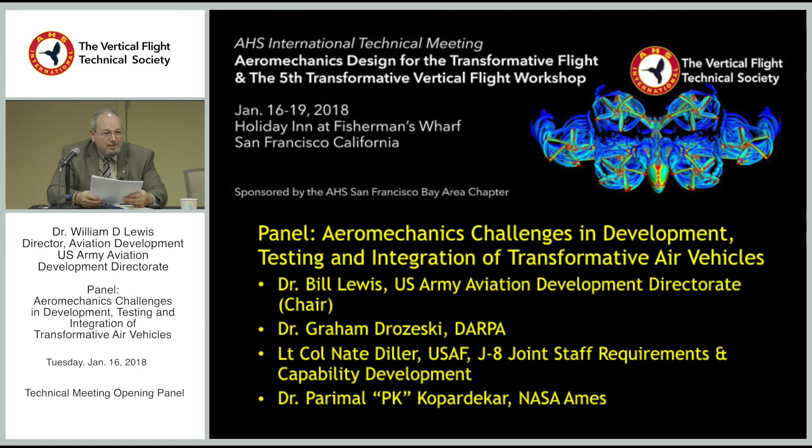But prior to getting to DARPA, Graham also served as a chief engineer down at Aurora, where he developed advanced VTOL rotorcraft and VTOL and fixed wing autonomy systems, transformational technologies, and operations for ship-based unmanned systems. He also spent some time as the flight technologies point of contact for Karem Aircraft, where he served as the lead for military rotorcraft developments. But the most important thing, he was a U.S. Army aviator. He got a PhD and a master's degree from Georgia Tech and a bachelor's from Notre Dame. Graham.

Thanks, Bill. Sounds like it's working. Bill introduced me at a specialist meeting something like 15 years ago. Army aviation, the VTOL community as a whole was in a very different place then. Comanche had just been canceled, DARPA followed by canceling UCAR. The V-22 was getting over the Marana incident, but it was still a very different time. The Army was backing away and saying, we want to go back and double down on our old platforms from the 50s, 60s, 70s.

Now, today, where we are, it's a completely different field. Where we've come in the 10, 15 years since then, from starting all these platforms, whether it's V-280, S-97, all the new things that are coming up in the commercial industry. That's what I want to talk about today. And I want to talk about synergies between those two spheres of development and how we can push forward as we move ahead.

Okay, so that's where I went through this slide, and here's sort of a quick look at two different but similar mission sets. And here we are, right here in San Francisco, and later this week I have to have a meeting down in San Jose, and I wish I had one of these things that got me there in 15 minutes. But I'm going to make that drive.

I'm going to talk a lot about both industries, and unfortunately most of the stuff that I talk about on this use case on the right is rooted in the Uber Elevate report. That's only because the Uber Elevate report's in the public domain and provides lots of good data. So please don't say that I'm advocating Uber above any other implementations in this realm, but certainly amazing things are being accomplished here. I'd also say amazing things are being accomplished here.

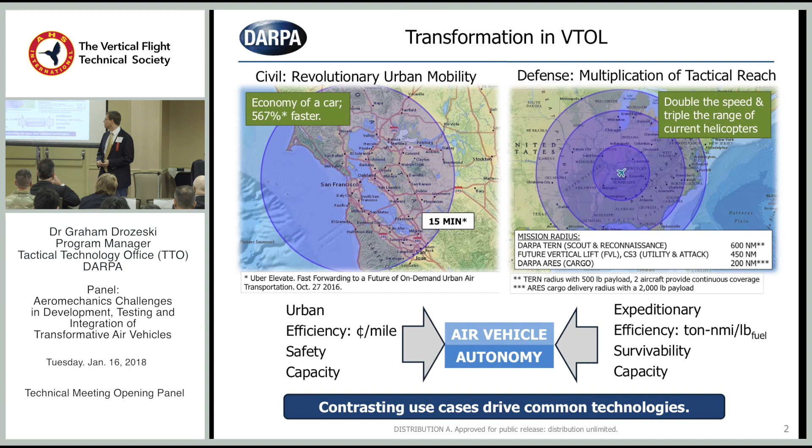If you look from the Black Hawk to the Future Vertical Lift, there's a 4 times increase in payload range. Now, Future Vertical Lift aircraft are going to be probably bigger than the Black Hawk. They're also going to be faster and have all sorts of other features we don't have, in terms of survivability and other capabilities built in from doing an aircraft so many years later. But there is a big leap there—a big leap in efficiency as well as a big leap in capability in terms of payload range.

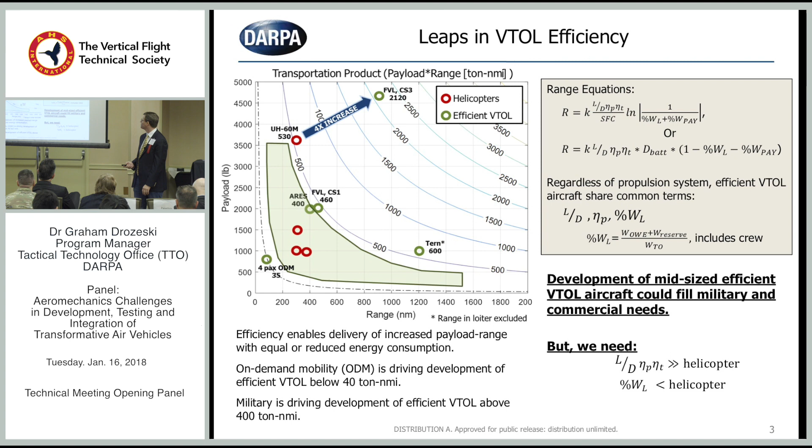And controlled flight into terrain is something I always bang the drum on. That is a large contributor. When you're at speed and you hit the terrain, the number of casualties on board is catastrophic.

That being said, as we start and look at use of these aircraft in routine usage in CONUS, in the national airspace, these sorts of fractions of non-human to human are also not acceptable. Not acceptable, maybe the percentages is acceptable, but we have got to dramatically reduce mishaps and fatalities to get wider acceptance of VTOL. And so either way you're going, I'd say all the civil stuff goes through this problem. It's a little different problem when you're not getting shot at, but it's still a problem.

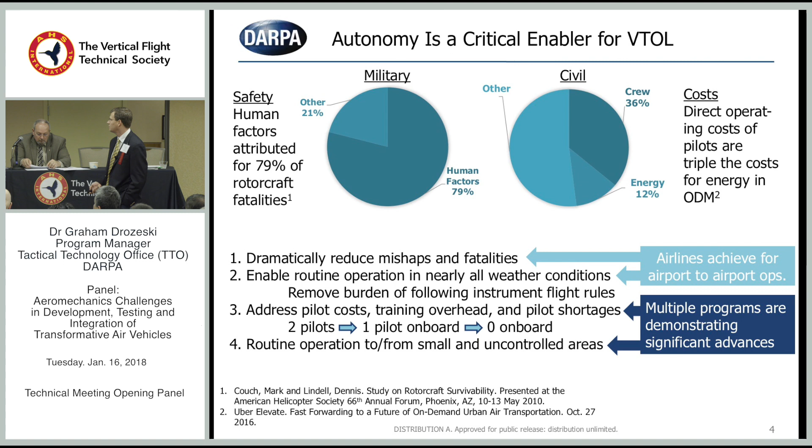I'm working on this, and I think I have a vision for the throughput we'd like to have, but all the ideas you have in terms of ways to get certificated autonomy in the field, I'm eager to hear. I think we want to be able to leverage all the great things people are doing in computing, non-deterministic algorithms, and emerging AI. We don't want to cut that off the table because of certification implications.

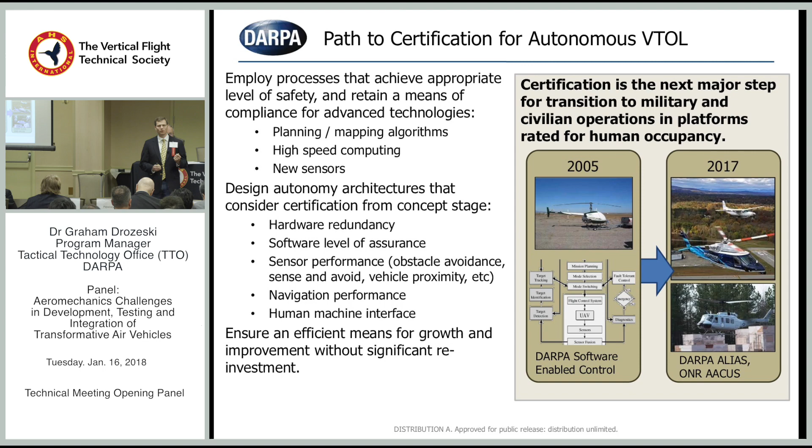The second thing I'd say is don't do it in a stovepipe, one-off method where I can't come back later and add a new sensor, a new algorithm, or a new sensor or algorithm from another vendor. I want this open so I can pull all this in without having to redesign and recertify all my flight code. There's a Tesla story - the Tesla saw a kangaroo and didn't know what to do with it in Australia because that wasn't in the database. How do we bring that in without rewriting our flight control laws? We need a way to do that. That's the second slippery slope.

Okay, this is a VTOL platform discussion, and I've been involved with a few of these developments, so I decided to talk a little about some heartburn, some scar tissue I have from those development programs. The sooner you can model the interior of the conversion corridor - not just at hover and at fixed wing, but in the middle - the better off you are. It's very easy to approach a program like this and say it's going to be somewhere in there, but the devil's in the details.

And I think there's been program after program that have come to the realization that I wish I had a better model sooner in the development. And so I'd say think about that.

I'd say all aircraft, even the coaxes that Sikorsky is pursuing, they have some sort of transition from a helicopter type regime to a highly efficient greater than L over D of 4 type regime. I'd say that when you write the requirements for your conversion corridor, think about everything you need out of it. There was Ashish, under his X-plane program, who said you need to have trim at all airspeeds, and that is a good way to define it.

But some aircraft need more than trim at all airspeeds. The tilt rotors need to fly descending approaches, which means you need to be able to trim with a negative gamma. We had on the Joint Heavy Lift program a CT on sigma requirement at 80 knots. So there's requirements like this that come in, but you need to understand them so you know what you need. And oh, by the way, there's failures that can occur at any point. I can fail a tilt actuator, I can fail any of these things, and you need to think about how you're coming back from that.

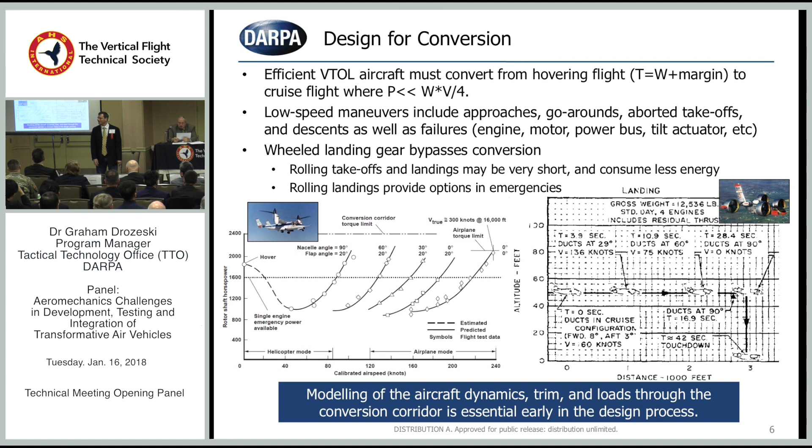This is my closing slide, and I'd like to look again at the pictures on the right. These are all military programs that either recently flew or are soon to fly. If you look at where we were in 2004 when Comanche was canceled, we're in an incredible place. We're going to revolutionize what the military can do in terms of vertical takeoff and landing in the near term, and all these things are happening even faster. It's an incredible time, an incredible opportunity to revitalize the military community that's driven VTOL.

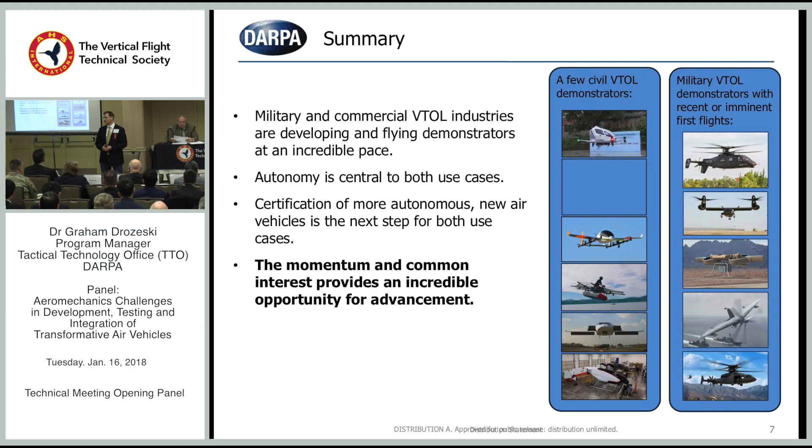The revitalization we can get from the community that's really home here in San Francisco is a huge opportunity, to drive new paradigms in certification, new ways of thinking about the aircraft, faster development cycles, and new ways of thinking about pulling software into the platforms. All those things are opportunities for us, as well as for the people, because this industry comes back to people, getting the young software engineer, the young aerospace engineer jazzed up to want to work in this field. It's great. So I'm excited, and with that, I'll turn it over to questions.

So with that introduction, I probably need to start by making sure you're not losing faith in Barry, who invited the fighter pilot to come talk to a bunch of professionals in the rotary wing business. Thanks for the opportunity to do that. Between Barry and Mike, they wanted me to talk a little about requirements, being in my current job on the joint staff, and also test, because clearly with my one flight in the Dolphin, I am the world's renowned expert on rotary wing flight test. So sit back, and I'm sure you're going to learn some things.

Thinking about some of the existential threats like Barry has with his job right now, maybe step back and look at what are some of the key questions of really why are we here today. And in doing that...

Looking around at a lot of the literature, we talk about the hype curves on certain things, and certainly eVTOL is quickly going up the hype curve. And so in doing that, with the humility of a fighter pilot, as everyone knows, looking at what are we really trying to accomplish here.

And it seems like a pretty humble pursuit, trying to revolutionize transportation for the world. So why not? It seems like a phenomenal effort.

Before we really start looking at that, I thought it'd be good to look back just a little bit at some of the other revolutions in transportation.

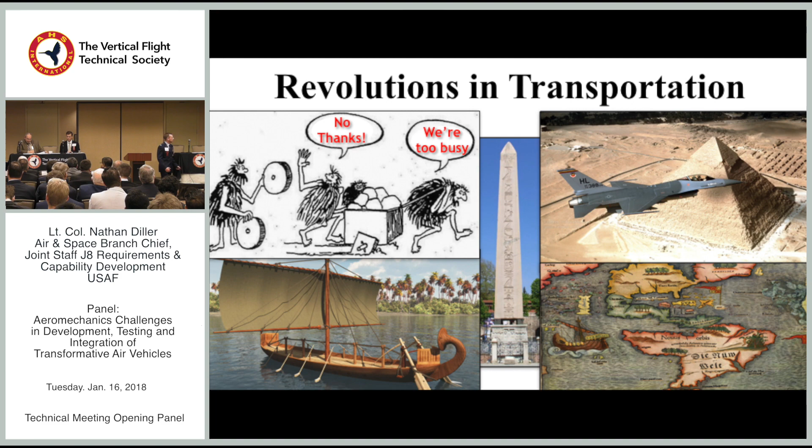Eventually, further revolutions in transportation started to go green and take wind energy and use that to start moving us across continents, revolutionizing transportation, again resulting in the amazing discovery of new worlds.

This revolution eventually started to heat up a bit. If we start at the bottom, with the steam engine helping push along the Industrial Revolution, the vehicles coupled with the Eisenhower interstate system allowed us to have a social revolution in the United States, and then eventually aviation.

And certainly, while the interstate and the ability to travel and ship a lot of things across sea were important, few could overstate the value of being able to connect people around the world and the globalization that resulted from revolutions in aviation.

And so there's been discussion that we're in this third revolution of aviation. Interestingly, one of the individuals that suggested that was currently working at a company in Toulouse, France.

I'm not sure how he didn't recognize the first one, given the French can't let you say the word Wright brother without talking about les frères Montgolfier. So starting with hot air balloons, eventually going into reciprocating engines, and then to jet engines, we see this transformation of revolutions in transportation.

Interesting, as you look across these different revolutions, there's some things in common, that there's also been an important requirement to invest in infrastructure: the railways, the roadways, and eventually the runways.

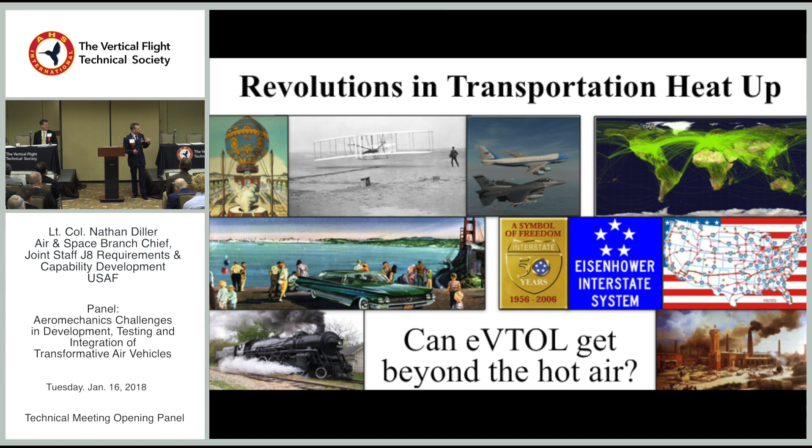Why am I here? That's the important part. If indeed there is a revolution in transportation that's going to allow us to accelerate movement of goods around the world, certainly in my current responsibility in requirements and capabilities development, the Department of Defense moves a lot of things around. And if there's ways of doing that at a lower cost, with a reduced loss of human life, certainly we have a responsibility to do that.

If you look at the amount that was spent on MRAPs, some $50 billion in trying to reduce IEDs. Just recently, there was a Distinguished Flying Cross for a C-130 crew that dropped goods into folks on the ground. If there's ways of doing that at a lower cost, a lower risk to human life, then certainly we should do that.

And so looking at this first from a cost perspective, certainly cost to human life, but additionally cost, looking at procurement costs normalized to dollars per 100 pounds, and then operations and maintenance cost. Again, open source data - anyone that's done much with cost data certainly knows never trust the numbers. But at a first hack, what do you see here?

In this red zone, each of these represents a particular aircraft. In that red zone, what you find is all of our recent programs typically have high procurement cost and high operations cost.

The other thing you'll find looking at this is among DoD programs, you're not going to find any VTOL programs down in that green zone there. Obviously, some benefit in potentially looking at distributed operations with that reduced operations and procurement cost. Besides the cost piece, there's also the schedule.

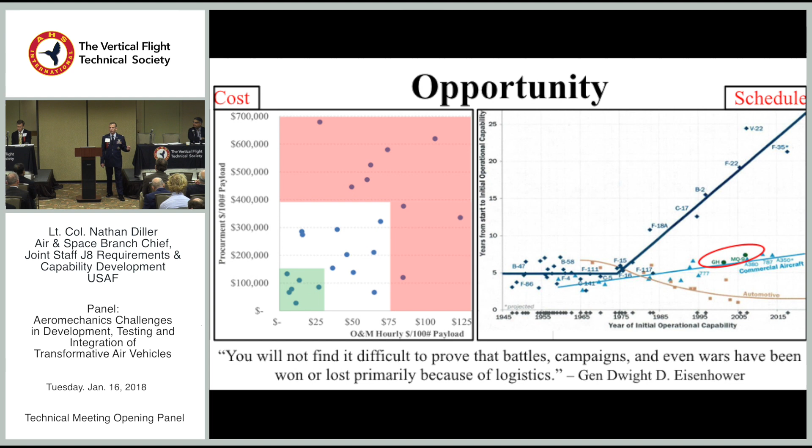And are there ways of reducing human cost, reducing the monetary cost, and reducing the schedule to be able to bring these products to field quicker? So that made us think, what are the opportunities that are out there? And at this current point, not necessarily hard requirements. We've got MUX currently in my portfolio, but among the Joint Staff we started looking at several of these problems. Why do we have some of these problems out there? And is there a capability set that could potentially meet several requirements, all with a new type of platform?

It's not necessarily a helicopter, it didn't seem like, not necessarily an aircraft in a traditional sense, but something that could meet many requirements with a bus-like capability, and the term we came up with was this Omni requirements bus idea of being able to meet many requirements by being able to attach new things to these new, smaller pieces of equipment and be able to realize then some of the cost and schedule savings.

When we looked at that, the advantages of the distributed propulsion, one of the other cost factors is the ability to get logistics from a sustainability perspective, reducing the multiple consecutive miracles that somebody like me looks at a rotary aircraft and stands in amazement that you can actually beat Newton down to the point that those things fly. But could we make those simpler and provide the capability at a lower cost to the field?

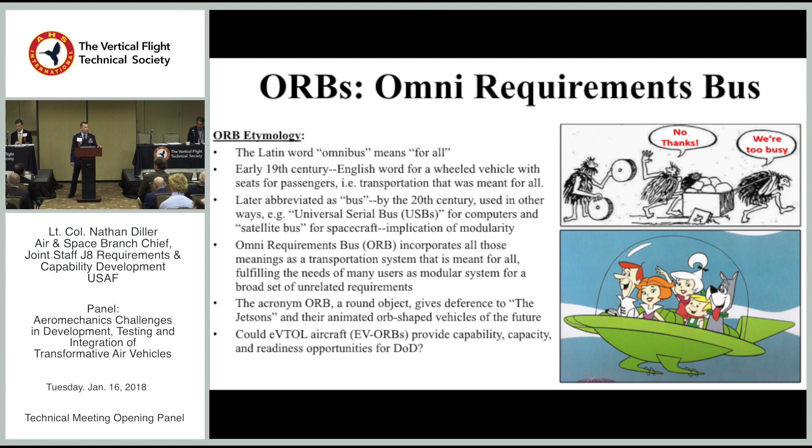So if indeed there is this opportunity, this revolution potential in aviation, how do we get there quickly? And I think fundamentally it requires some trust. And again, echoing some of the things that Graham had mentioned in terms of being able to distribute some of the risk across this triple helix idea between academia, industry, and government. There's different risk profiles that we can take, and we can share risk differently.

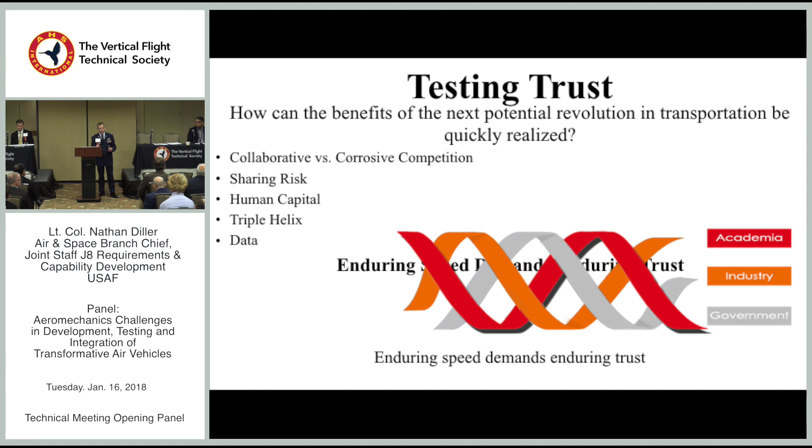And so what are the opportunities for that collaboration, to share that risk, to find the right human capital in these different areas, so that if we really want to get to an enduring speed of development on these capabilities, there has to be some degree of enduring trust among the community. And I think that starts with test. Looking at the test, a profile of the probability of failure and impact of failure.

As we look at that, there's a lot of different ways of approaching that. Obviously, if I sit on my couch and eat potato chips all day, low risk of me dying in an aircraft accident. But there is a very high risk that I'm going to just sit there and get fat. And I think to some degree, in some of our risk profiles, we might not be taking enough risk. But what I'd suggest is that by looking at culture, approaching the speed of development at the right pace, improving collaboration between different organizations, we can eventually increase the trust level that allows us to take a lower risk profile and still stay accelerated.

Looking at test, fundamentally test is managing that risk. Starting with the requirements, some of the bench testing, subscale testing, eventually moving across into the prototype flights, and in this case now starting to look at how we approach autonomy and build trust in that autonomy from the pre-acquisition stage in laboratories, moving into ranges, and then on into the actual operational environment. Again, echoing Graham's remarks, we can't just go fly one prototype and say that's good. But getting those prototypes out there and learning quickly is critically important.

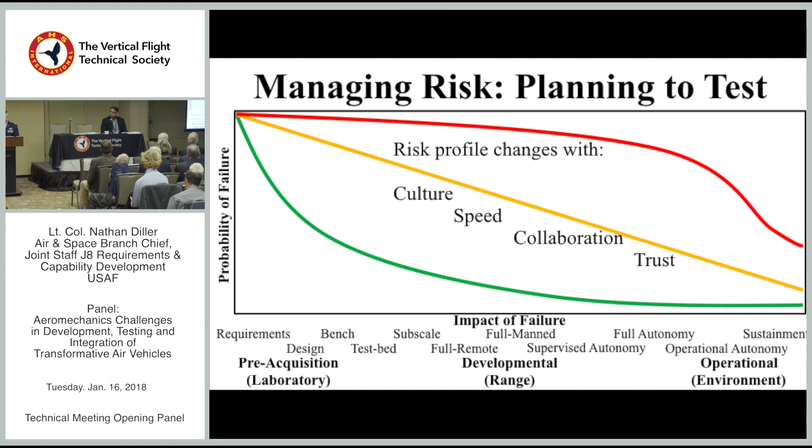So as we begin looking at this, first and foremost, from flight test, what are kind of the three core things that they teach? Performance, flying qualities, and systems. And there has to be good test measures across those things, agreed test measures, so that you know that you're getting the right data, so that if there is a deficiency, there's a shared understanding of what that deficiency is, and then a potential of a redesign, so that from a validation perspective, the aircraft is actually meeting the requirement,

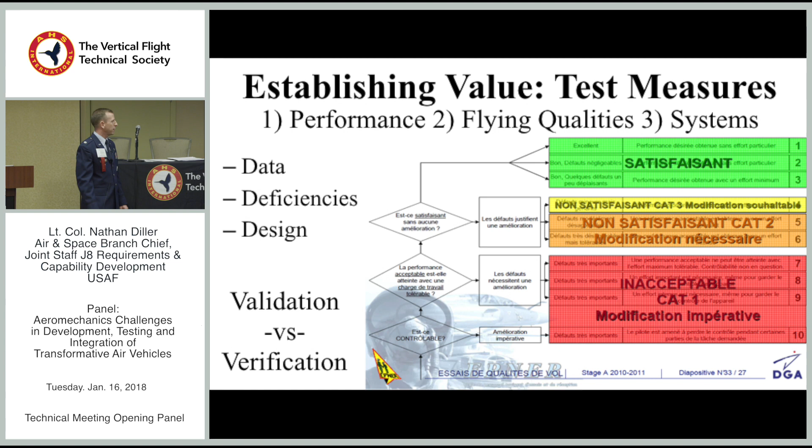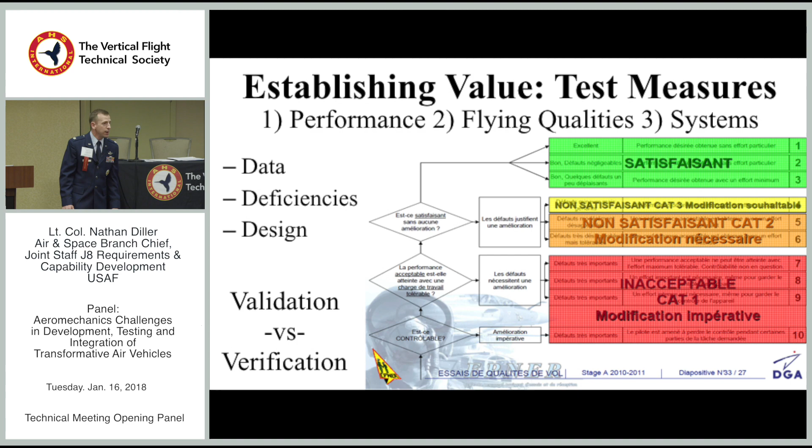and from a verification perspective, did I look back at the right thing? And so, for example, a Cooper-Harper rating. I think there's some challenges as we move into this new world. We don't necessarily know what the flying qualities might look like on this. We don't necessarily know what it means to be a pilot in these scenarios.

From looking at test requirements and designs to the beginning of this, as many of you know, a significant amount of the leverage that you have in management comes at the very beginning of that cycle, the concept development. And so what are the things that you can do by incorporating a test team early into that, designing to some degree for test, and then keeping that test team engaged?

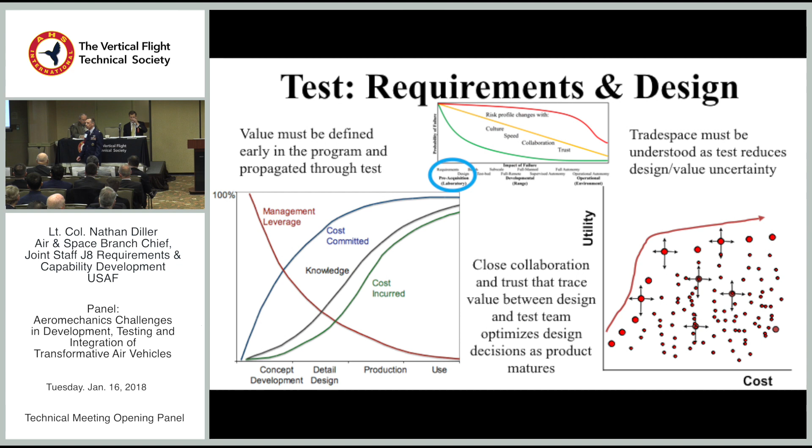What is test doing? So if I were to imagine some way of flowing a physics-based design through a value function and a cost function, there's some uncertainty around that at the beginning. The purpose of flight test is to reduce that uncertainty. Oftentimes when you're reducing that uncertainty through flight test, there's some redesign there. And so having closely coupled test teams with the development teams in order to iterate quickly and update those designs.

Another piece is this concept of slowing down sometimes to speed up. So if you look at me closely, besides doing flight tests, you'll see many scars. The Air Force at one point decided it was important for me to go get some program management experience, and I spent a couple of years dealing with intellectual property rights on cyber resiliency modifications. What I learned from that is it's very hard to go back after the fact and try to fix embedded systems.

And so what I would suggest is if we are going to start developing these systems that are highly hardware and software dependent, making sure that some of that is baked in from the beginning, starting to look from the outset, what are the roles of DO-178? How can some of that be done from the beginning, still moving quickly with a prototype, but understanding that eventually if you're going to get to a certification level to fly in the national airspace, whether I'm going to the battlefield or to the soccer field with this new type of technology, there's a need to make sure that there is trust in those systems, especially if we're moving towards more autonomy and more dependency on them.

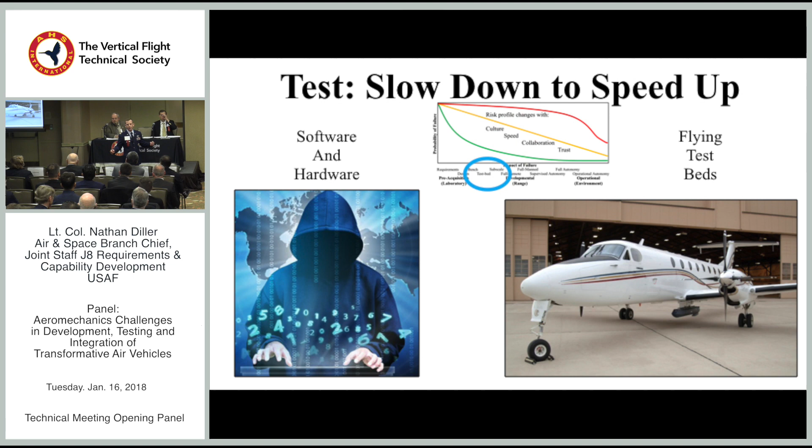Additionally, slowing down to speed up: when I was flight test commander at Holloman, we would go fly new things on old airplanes. Can we use flying test beds to accelerate some things? Would you rather fly a fully integrated system quicker? Yeah, maybe so, but with the lessons that you can learn by distributing that test, again, distributing some of the risk, you might actually speed yourself up.

Last, from a pilots and autonomy perspective. So, being an F-16 pilot, my brother flies B-2s. We grew up flying ultralights on a family farm, and that was very much stick and rudder capability. Today, anytime we're getting in those planes, we're basically a voting member. And so there's been some development where we have been trusting more and more computer intervention in what we're doing. Those airplanes wouldn't fly without that.

The F-35 first missile shot there, sending an AMRAAM off, is a significant amount of trust in a missile that is a launch and leave. And so how do we go and leverage some of that in order to build that trust? One thing we do at the test pilot school, when I was an instructor there with the F-16, while it was a flight control system that was highly augmented with a computer system, it would put limits on the angle of attack. And in theory, it should only go to 25 degrees AOA.

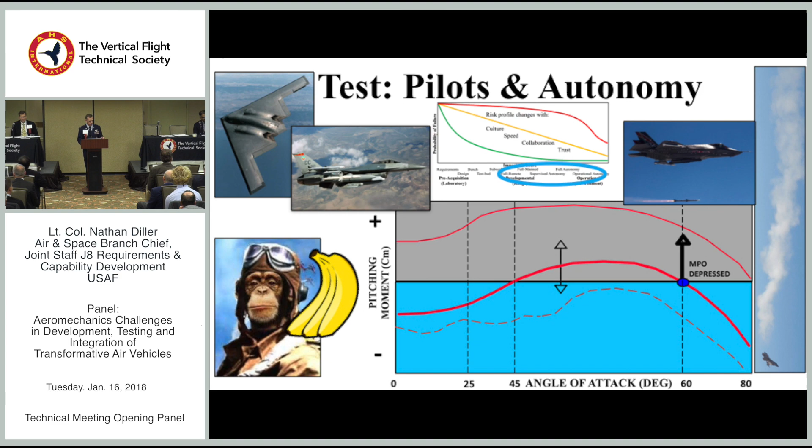So, in closing, I think certainly a very strong case can be made that we are in a revolution. I think huge potential benefits can arise from this revolution, but in order to get there quickly, what are the things we can do in testing to get data quickly, to develop trust in the systems, to develop trust across those communities?

And a final note, I think it's important to really think about some of the culture. Having an opportunity to fly with several different countries, across several different types of airplanes, obviously the rotary wing, the hang gliding culture, my 12-year-old there trying that out. There are significant differences in cultures. I think, interestingly, here with the software and with a lot of the folks that are getting involved in this, integrating the Silicon Valley culture with a military culture, with a civil aviation culture, how do we do that in a way that accelerates trust?

How do we do that in a way that encourages, I spend a lot of time with some of the STEM programs and young kids. It's amazing how energized they are by seeing kind of this sci-fi opportunity that comes from eVTOL. And how do we bring them in quicker to a community that develops trust, a community that allows us to accelerate this capability and bring the fruits of the potential eVTOL revolution to the Department of Defense and across the world?

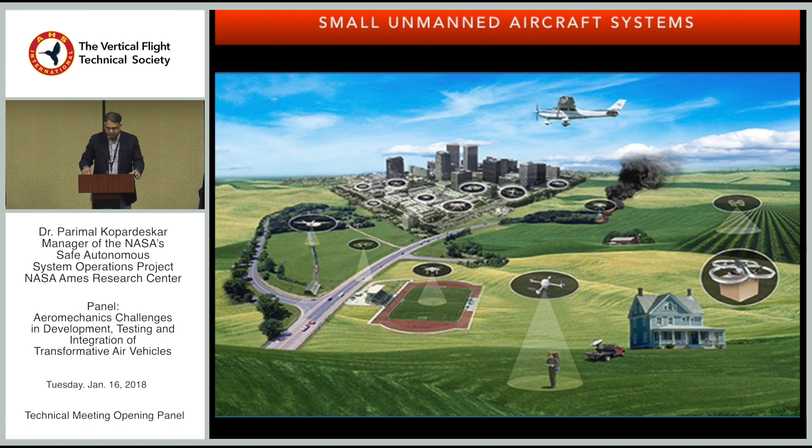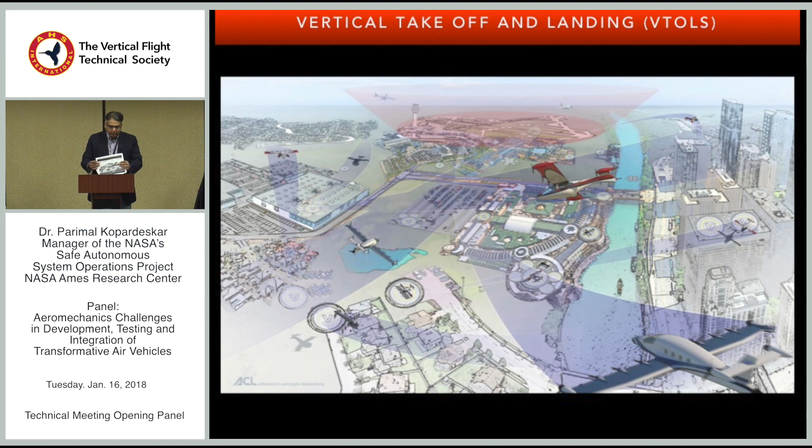Then you move forward and ask, okay, what will happen? You start to postulate that drones, conventional helicopters, and electric or hybrid VTOLs will all be operating in the same airspace. Quickly you realize the scale is going to be tremendous. Even though we don't have a reliable forecast yet for when this will happen, the idea is to conduct research, development, and testing to enable this kind of environment so we can safely manage all these operations and give maximum value through air. That's sort of what we are working on.

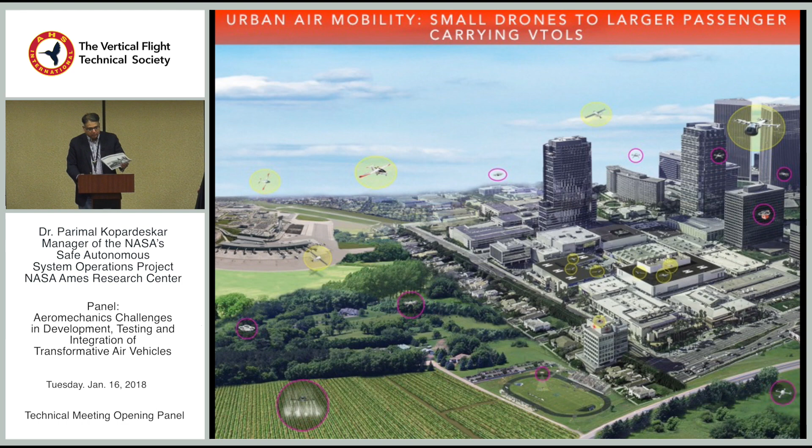You go even further and ask, what would that mean for all airspace users? You saw the picture of the small unmanned aircraft system, you saw urban air mobility. Currently we have subsonic transport aviation that's very well matured and is growing as well. Then we have high altitude upper airspace operations coming up with Google Loon, Facebook Aquila, AeroVironment, and a whole bunch of DoD operations.

Then you have supersonic, hypersonic, and commercial space operations - that is also now vertical takeoff and landing. I don't know how much we characterize that in this group, but commercial space operations - they all want access, they all want efficiency, they all want safety, and they all want scalability. That's the problem I'm really passionate about.

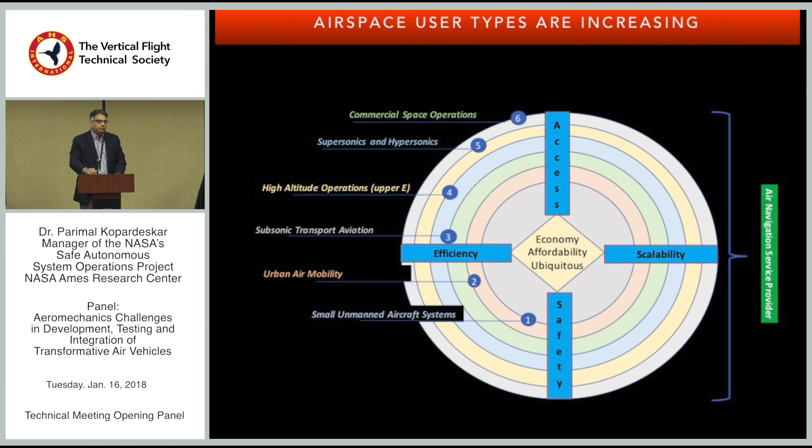Let me skip one chart and get back to this architecture chart. When we talk about urban air mobility and airspace integration, what are the main principles? The fundamental principle, looking at the bottlenecks and lessons learned from the history of air traffic management, which started because of the collision over Grand Canyon in 1956 - as you know, FAA started in 1958, NASA also started in 1958 - fundamentally, we want to provide no burden on the current air traffic management system.

That's one principle. Second, it has to be cooperative and interoperable with other users, so we can accommodate multiple heterogeneous users. It's got to be performance-based and risk-based, so your characterization of performance allows you to fly based on where that performance is most suitable. If you're flying in very tight corridors, you need a different type of equipage, and if you're flying over ocean or low-risk areas, your uncertainty can be higher.

Efficiency is something we always want in the system, as you heard from our second speaker on logistics - wars have been lost because of the lack of proper and efficient logistics. Safety - our first speaker talked about the need for safety in all types of operations, particularly as we move towards autonomous operations. And for you and me, sustainability of these operations, scalability and affordability becomes very important.

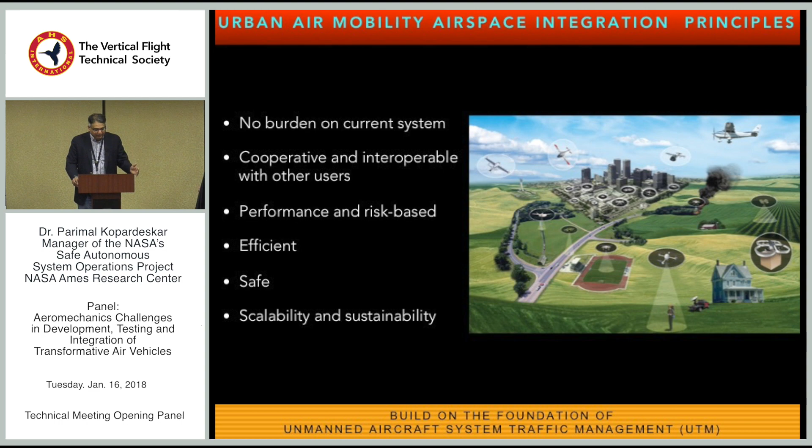So that common people like me who are civil servants can also afford these operations and air taxis. Even though I live in Silicon Valley and have lots of rich friends, I jokingly say, oh, we tripled our profits, and they say, what are you working on? I'm working on trying to triple the capacity of the airspace - and they quickly lose interest. That's not what the tripling effect means for them. But joking aside, that's how we get passionate about it.

So let's get back to the architecture. Looking at all these operations, what are the different ways we can accommodate them without burdening the air traffic controller system? Here you see the flight information management system, which is the FAA side of the house.

You can see the operators, the urban air mobility operators, and then we characterize another term called USS, or UAS service supplier. This three-way division of labor and roles and responsibility allows us to change the paradigm of the current system, which is everything goes through the air traffic control system, and every change to your trajectory or flight has to be approved by ATC, every speed, altitude, or heading change.

Now we do the opposite: tell us where not to go, and we'll figure out how to get there. But to get there, we need complete digitization and connectivity. The flight information management system will tell you the constraints and any directives in the airspace—stay away from this because there's an airport, firefighting activity, or the president is visiting.

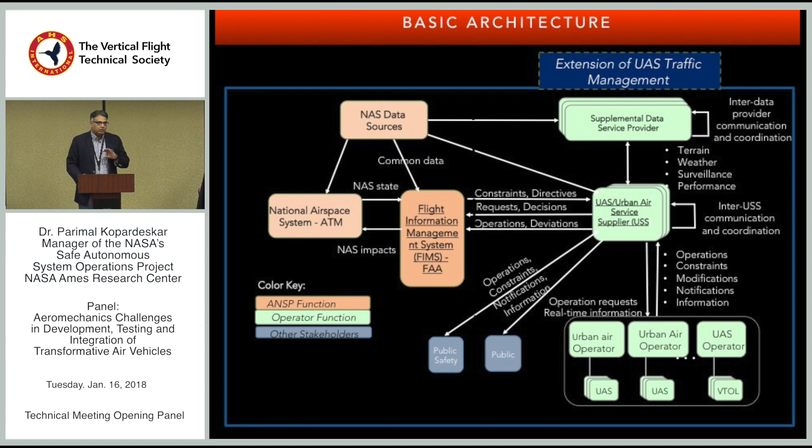Largely this construct starts off in the uncontrolled airspace, Class G, as a starting point, and slowly evolves to upper Class E, and other locations where we can start to move towards a service-oriented architecture. So this is the basic idea of changing the paradigm of current operations to enable the scale we're referring to with these new vehicles and new air.

The fundamental premise, the mantra here, is flexibility where possible and structure where necessary. As I mentioned, in the current ATM system the structure is guaranteed and flexibility is the exception, so we flip the model completely. But to get there, we need lots of connectivity and information exchange.

You see the layering of this system: we had to guarantee separation, then guarantee some spacing to stay away from each other. Scheduling then becomes important, because if everybody is trying to go to the same vertiports or nearby locations, how do you schedule them so we don't end up bunching together? Then demand capacity coordination happens.

Today's world does demand capacity coordination primarily for workload, runways, and gates. As you move towards VTOL and helicopters and other operations, you have to worry about demand capacity for noise as well as spectrum availability and vehicle volume. So there are subtleties that emerge in terms of capacity and demand—you can only accommodate certain vehicles because of noise constraints and such.

This is where research on aeroacoustics and noise modeling, which my good friend Susan is championing, becomes really important. Then these services are cloud-based, so logistics is about making things efficient—we want these services to be very efficient, but they don't need to be centralized. They can be in the cloud, and you can continuously get information about the weather.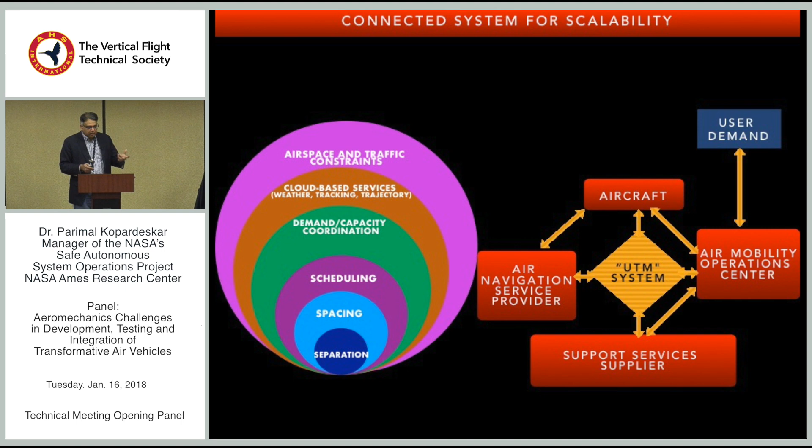But to do that, we need the structure—the connectivity between the aircraft, the air mobility operations center, the service suppliers mentioned in the last slide, the air navigation service provider, which is FAA in our case, and the demand generated by the users. So really, it's about a connected system to enable the scalability we're referring to.

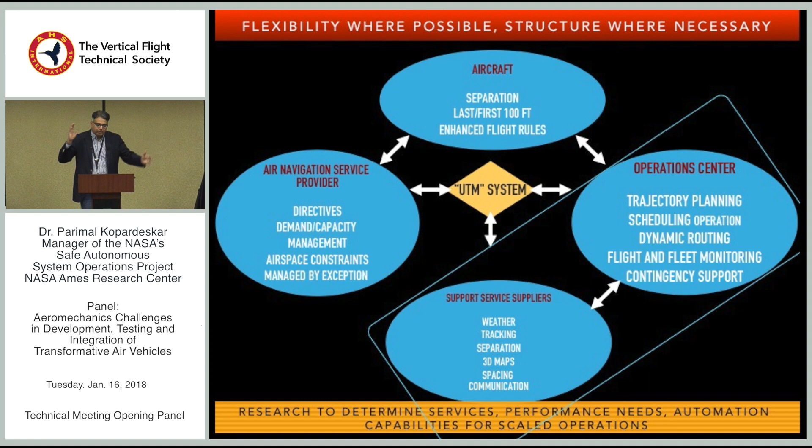Here is another example of that connected system, as I mentioned, flexibility where possible and structure where necessary. So if you're going between two vertipads and you've got a bunch of other vehicles going, and all of a sudden high winds show up, then you say, oh, I can't land there. What am I going to do? If you want to find a safe landing spot in a different vertipad, you also want to know that vertipad is not occupied. So that information about the availability of the resource becomes important. So this is why you need to have connections to these other systems.

So the idea is to basically understand all the constraints in the airspace and connect them through the cloud or other services, and then figure out what is the best way to get there.

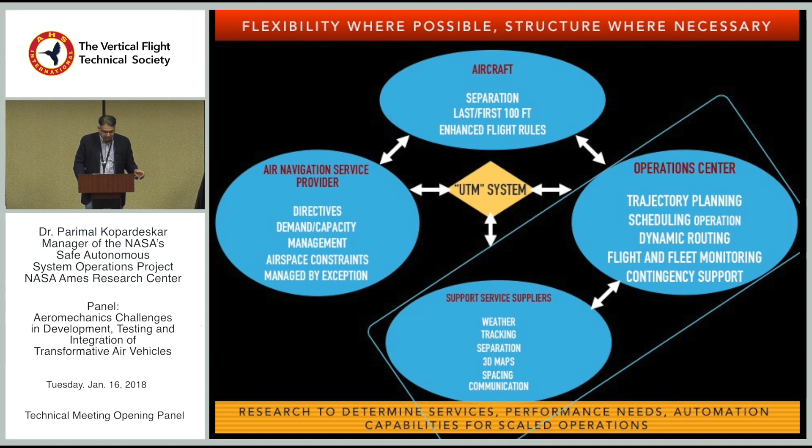Now, if you look at the aircraft, and assume that it's autonomous aircraft because that's the only one that's affordable for people like me, because the pilot costs are not necessarily affordable, then what do I do? So you need to have basically fully autonomous capability for takeoff and landing. That means the last and first 100 feet becomes extremely important as you go close to the vertipad you want to land. So all these pieces become extremely important in terms of operations center, doing trajectory planning and fleet management, scheduling, as well as the support services, the connections into the air navigation service provider and the aircraft.

So now once we connect these services, we say, well, how do we go about there? The previous two speakers talked very nicely about the need for testing and then walking through that tight path to get to the acceptance. Obviously we are one of the safest industries, and we want to maintain that, so we're not going to willy-nilly go towards some architecture and processes and practices that are not proven.

So we go through crawl, walk, run, and fly takeoff approach. We start with this is the right opportunity for us from an airspace perspective because the density is low. So we create some initial operational capability. For example, you can start off with helicopter routes. There are about 10 cities that already have charted helicopter routes using today's procedures.

We talked about that architecture that we leverage in the UAS traffic management, UTM. So entry into the controlled airspace can be done through the UTM system. One of the things we described in UTM very well is the data exchanges among operators to share intent with each other, as well as the data exchange about the trajectory or area of operation into the FAA system. So using the standardized protocols and the data exchanges, you can enter into the controlled airspace. FAA also has a program called LAANC, Low Altitude Authorization and Notification Capability, that leverages the UTM data exchange protocols, allowing you to see which airspace is open and available for them to enter.

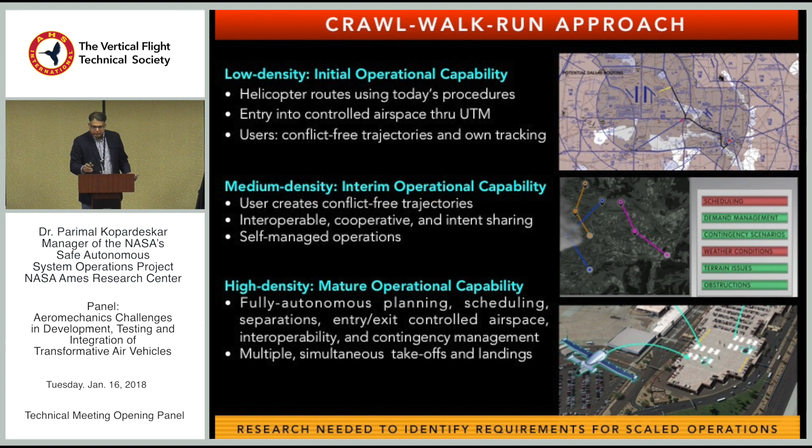From the perspective of passengers, it's efficient to do that, but then from the perspective of operations, what is that space among the trajectories based on uncertainty and a lot of other characterization of winds and impact on vehicle performance? So let's see how we get to this path towards scalability. We all want scalability, of course safety, efficiency, but we want to get to the high density or high scale.

The operator will still be responsible for plans, schedules to the plan, through the UTM kind of characterization. You will track your own vehicles, either through wireless, satellite, ADS-B, or a whole bunch of other systems, beacon-based or pseudolites connected through the UTM, so you have a fundamentally good idea of where you are. If you deviate from that, the UTM system needs to inform other operators that there could be a strategic conflict.

You will also need, of course, detect and avoid and other technologies if you want to be fully autonomous. And then air-ground cloud integration system is absolutely necessary, as we talked about, in terms of scalability, to maintain safety and efficiency at the same time. The last first 100 feet is something that is going to be needed for every autonomous vehicle, to ensure that when they take off and land, there is no disturbance in their trajectory and profile.

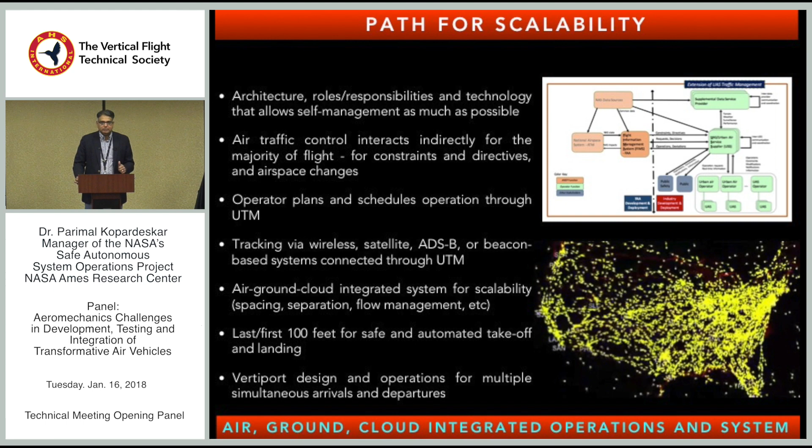And we talked about vertipads, the need for vertipad design guidelines and operations for simultaneous multiple takeoffs and landings, which is key. The idea here is to have this whole integrated air-ground cloud integrated operations and system that allows us to get there.

Now let's look at what this environment may look like in terms of a UTM style cooperative environment. The characteristics of that UTM style construct are cooperative first of all, so you share with each other intent sharing, data exchanges among operators, and those are very well defined - what kind of information you exchange, what format, what's the latency, and such - with standardized application protocol interfaces, APIs, air-ground integrated architecture, service-oriented architecture so we can leverage services from industry rather than only provided by ANSPs as happens today, and then there's a role for third parties.

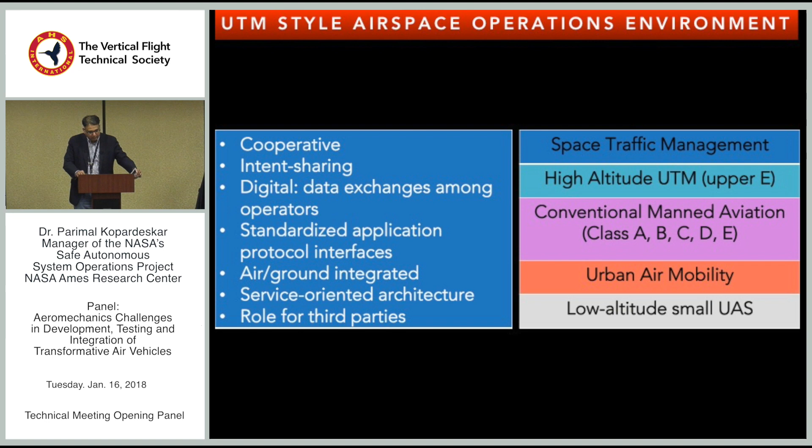So that allows us to move towards innovation in airspace operations. We start off with low altitude airspace operations, class G, where there are no services. We also look at high altitude UTM, upper airspace E - there are no services provided by ANSPs today. Space traffic management is another emerging need where that kind of operation characterization and self-management is going to be key. And then slowly we get to conventional manned aviation, which will take a long time to transfer towards the UTM style sort of operations, but nonetheless you can start off with some of the philosophies and service-oriented architecture.

Now, as I mentioned, and this is the point I keep harping on, connectivity is really key - to understand the resources at the infrastructure, availability of the vertipads and vertiports and landing spots in real time, as well as the vehicle characterization as to where they can or cannot go, whether they can go through the tight corridors that certain locations require, the airspace constraints and operations, the weather aspects, scheduling and spacing, and fleet management. You might have to consider where the fleet characterization is and where the maintenance hubs are.

So, for example, you could have a bird strike and you have three decisions to make on the vehicle. The vehicle is autonomous - imagine that vehicle has to make a decision: should I land now, should I continue, or should I go back home? The idea is, okay, well, I want to land at the nearest spot - let's say that's the decision the vehicle makes. Well, how much time do you have? You have three minutes, for example.

Then you think, okay, should I go to this vertipad? If so, I need to be assured that vertipad is open and there isn't much congestion going on there. It just happens that vertipad is experiencing high winds - well, then I need to be able to go to some other vertipad that's available and guaranteed for me to safely land, and I need enough energy to get there. So it really requires that you understand airspace constraints as well as availability of resources so you can make these decisions autonomously. When we talk about autonomy and certification of autonomy, this characterization becomes very, very important.

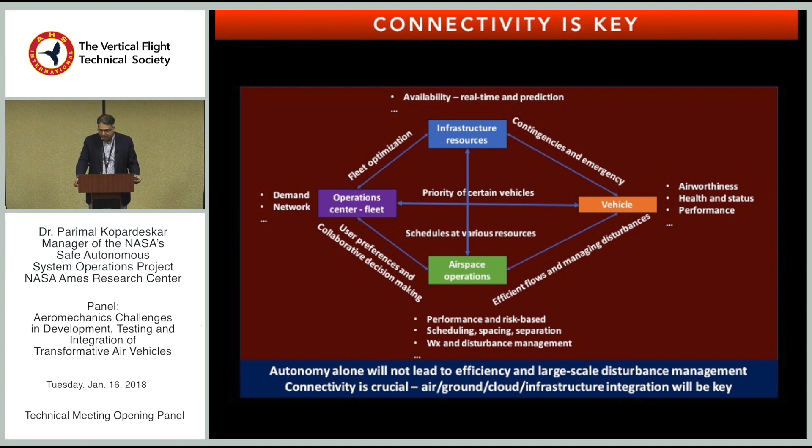Autonomy alone will not lead to significant efficiency and the ability to manage large-scale disturbance. We only talked about one vehicle. What happens if you have 17 other vehicles along the way, and you need to get everybody out of the way so you can land because you have an emergency situation? Large-scale disturbance requires complete understanding and connectivity to manage these operations in an efficient and safe manner.

In terms of research, this is a very exciting time for people like me and you, where we can start to look at how to create scalable environments for en route as well as arrival and departure operations, particularly focused on off-nominal cases, cooperative and interoperable operations. We're starting from a place where there are no services right now, so it's easy to look at the vision of this cooperative and interoperable operation, designing vertiports, multiple vertipads in a cluster, and proximity to other vertiports and vertipads.

Weather-tolerant operations, as I mentioned before, 75% of the delays are due to weather. What kind of characteristics about the wind do we ought to know? We've learned important lessons from small UAS; some vehicles with low wing loading bounced around quite a bit, and that has implications on how close you let them fly on top of each other or next to each other, so weather becomes very important. Electric VTOL vehicles are a bit heavier than the 55-pound class, but understanding the impact of weather and wind is still very critical.

High winds, wind shear, updrafts, all the things we had to consider, power depletion, bird strike, everything the previous speakers also talked about - figuring out how we are going to manage off-nominal conditions and contingencies is where acceptance will basically be key. So a lot of our research, and I encourage you all, should focus on contingency and off-nominal conditions and how we are going to be able to manage those.

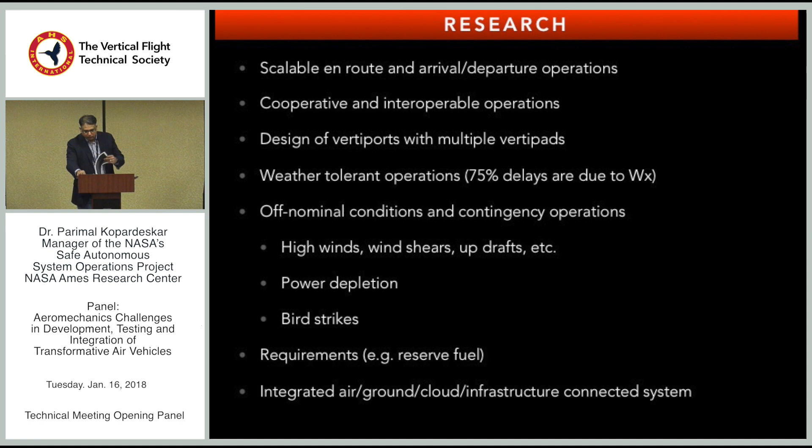We are all about innovation - this is Silicon Valley, hub of innovation, you can't give a talk in Silicon Valley without talking innovation. So this is all about innovation. But at the same time, aviation is all about safety. So here we're trying to marry and embrace innovation in aviation, while at the same time respecting the safety tradition of aviation that we've all come to value.

So thank you again for your great service to the community. We're looking forward to collaborating with many of you. At NASA, we have Susan's project, our project, and what Colin is working on - we have a lot of opportunities for you all to collaborate, and we look forward to working closely with you to make this next generation of eVTOL industry happen. Thank you.